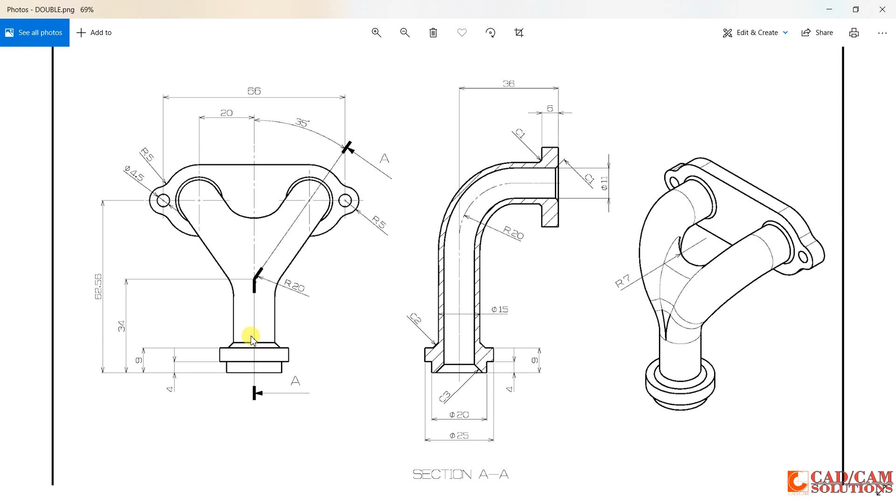Chamfer 1 and chamfer 2, both 1 millimeter chamfer. I will start from front and side views, from both, for creating a combined curve. So let's start with NX. First I will select this sketcher and click over front plane, meaning YZ plane, and click OK.

First I will draw this curve which will start from the origin and attain a certain angle. Now dimension it using rapid dimension. This length is 34, change it to 34, and again this, and the angle.

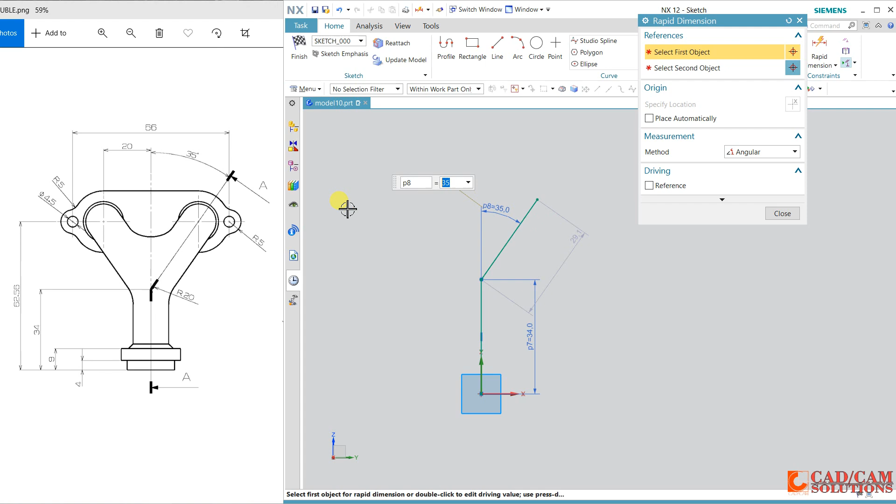So first I will define this angle as 35, enter, and height is 62.56. Change it to this, from this point to this point, and this is the length, 62.56. Now my sketch is fully defined, and here is a radius.

Select this fillet, and radius is between these two points. Finish it.

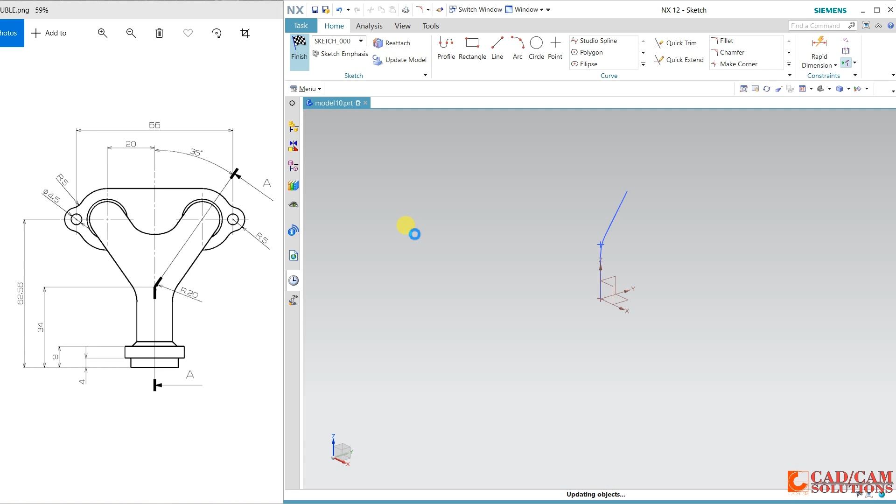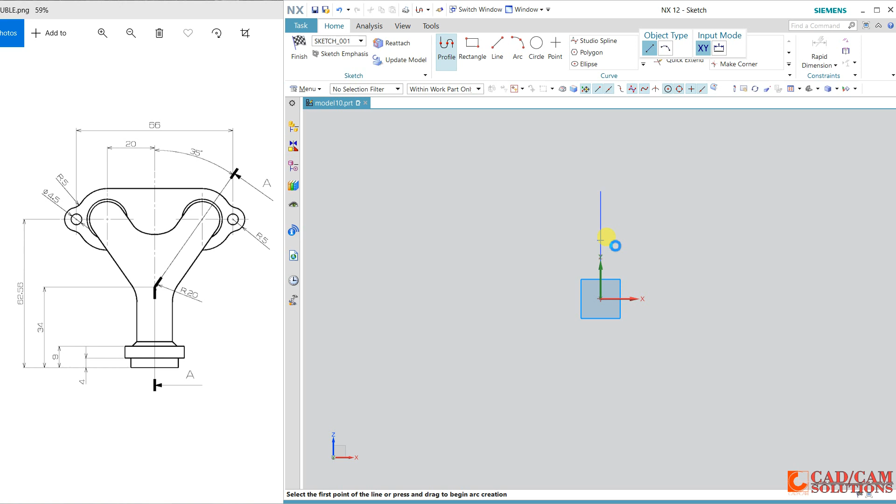Now select another plane which is our perpendicular plane, meaning this one. So for sketch, select this plane and orient the view so that it will come in front of us.

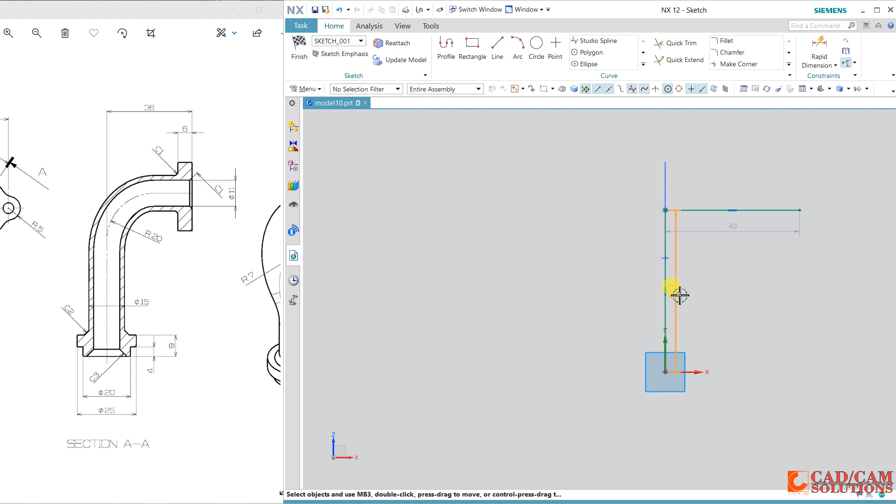Now second curve is this. I start from origin. Now dimension it: this length is 62.56, this is 36,

and one fillet is there which is of 20 radius. The sketch is properly defined, fully constrained.

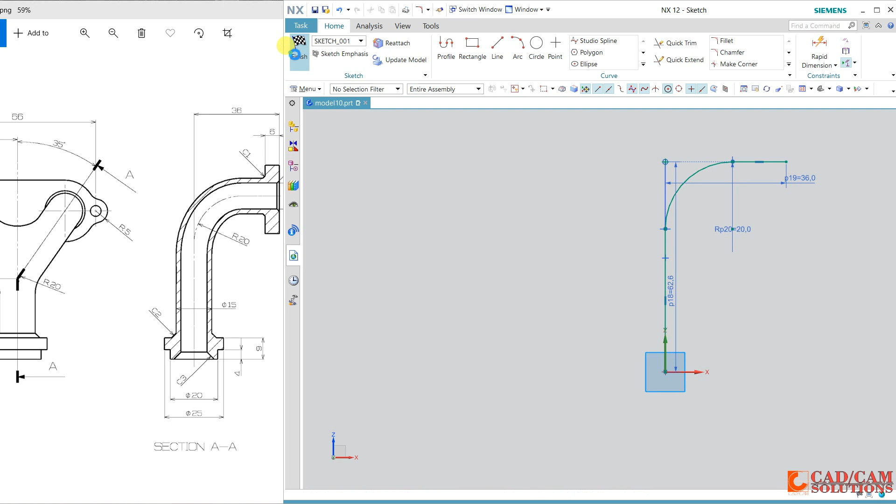Now we have two curves. Now I will generate a combined curve. You have to go to Insert, and here in Derived Curve we have one option: Combined Projection. This will create a combined projection of two sketches. My first sketch is this, and second is this. Now preview and click OK.

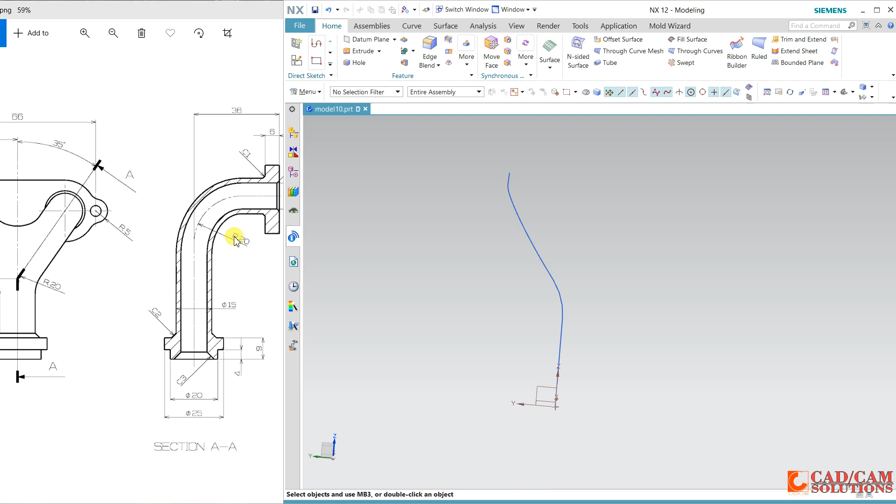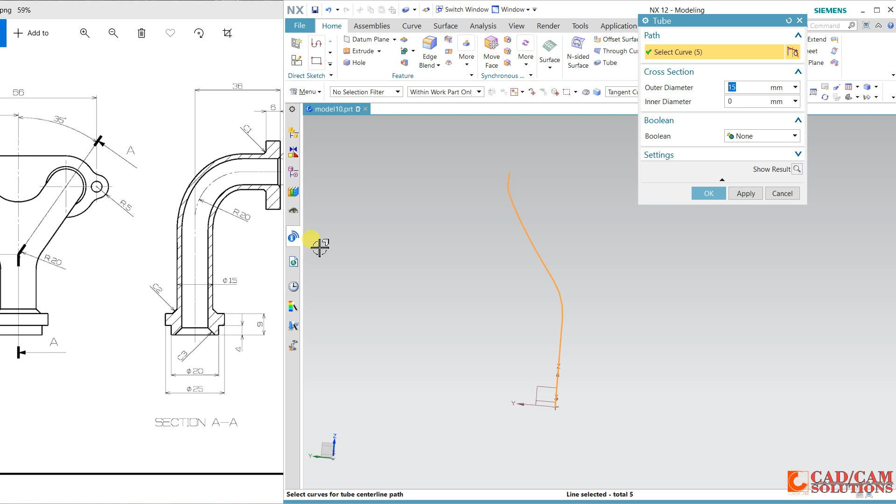Now I will take this tube. You will get this tube under the Sweep command. Here we have Tube, select this curve, and the outer diameter is 15. So select 15 and OK.

Now mirror it. So in more we have the mirror feature. Select and mirror about this point. Now I want to join these two objects.

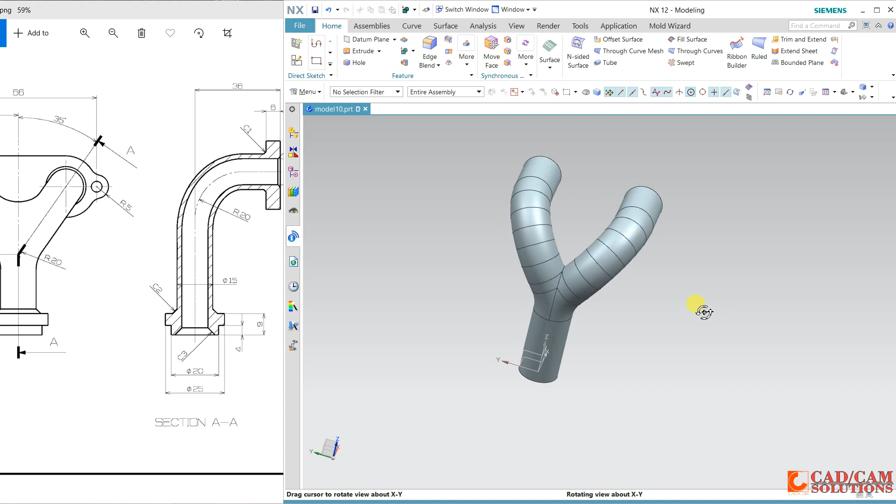Okay, and here we have one fillet of 7 radius. So select edge fillet and click over the intersection edge, radius is 7. So my sketch is ready.

But this is hollow. So again I will select this tube, and before selecting the tube we need this combined curve, which is here. So select tube, and this time the diameter is 11, the internal diameter.

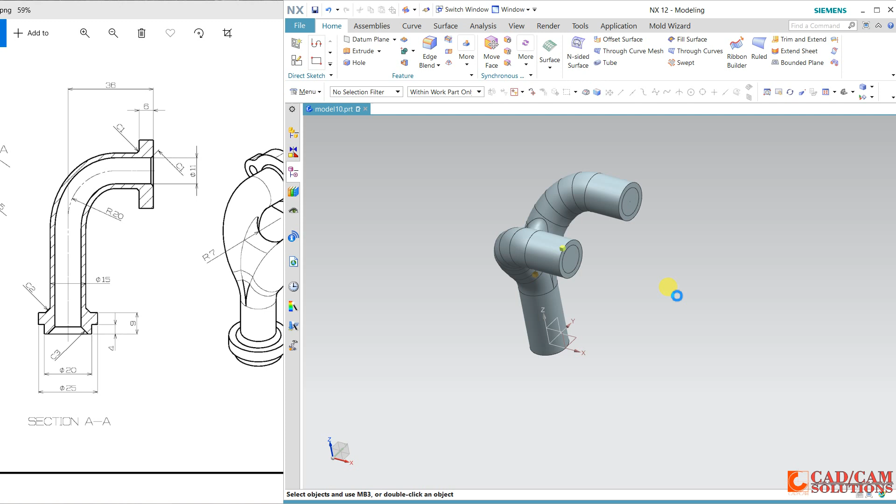Preview, apply, and mirror it with the mirror feature. Select this, and mirror plane is this, click OK. Now I will subtract these two pipes so that this combine will cut.

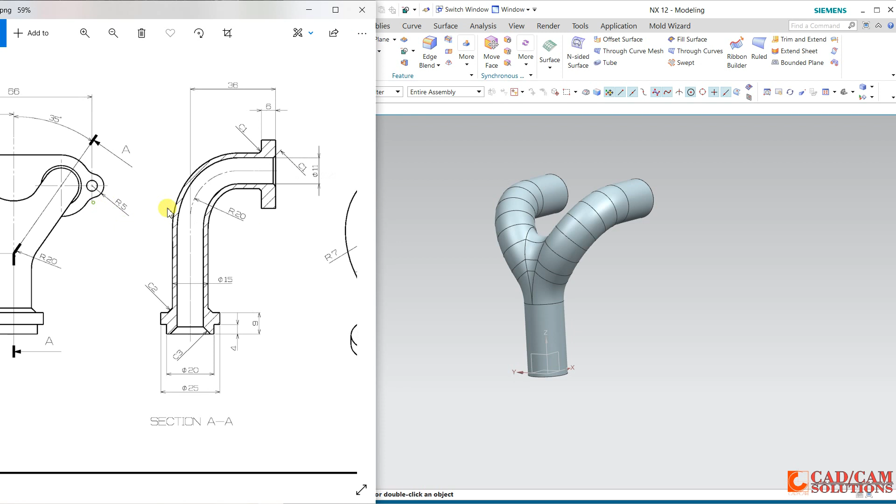So this is my main body. Now I will create this portion. Go to sketch, select this face, and orient the view, click OK.

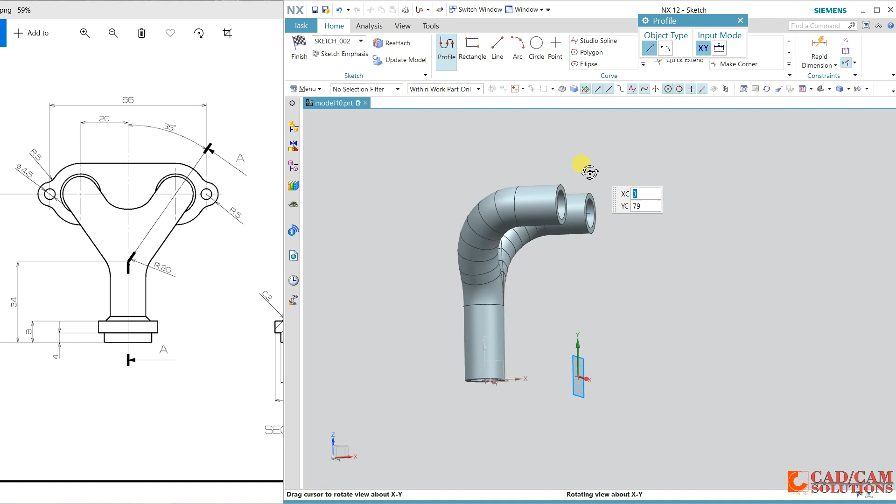Use this project curve, and one more circle is there. I will start from this and make equal radius.

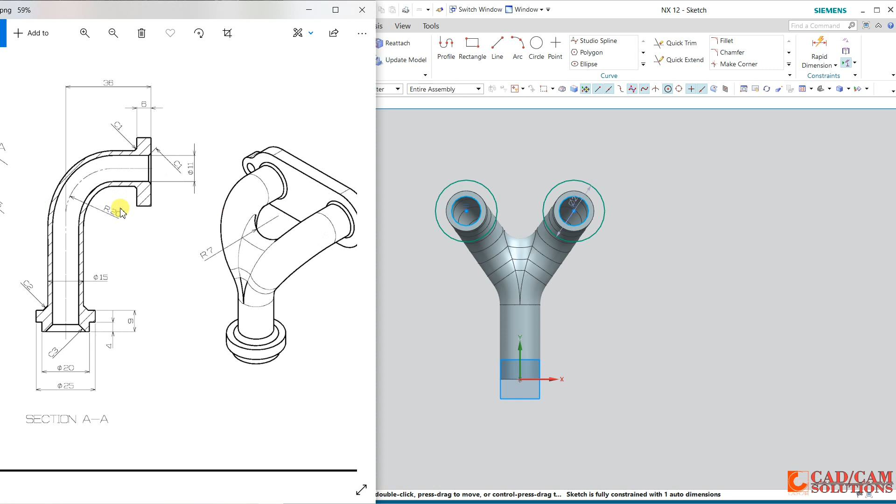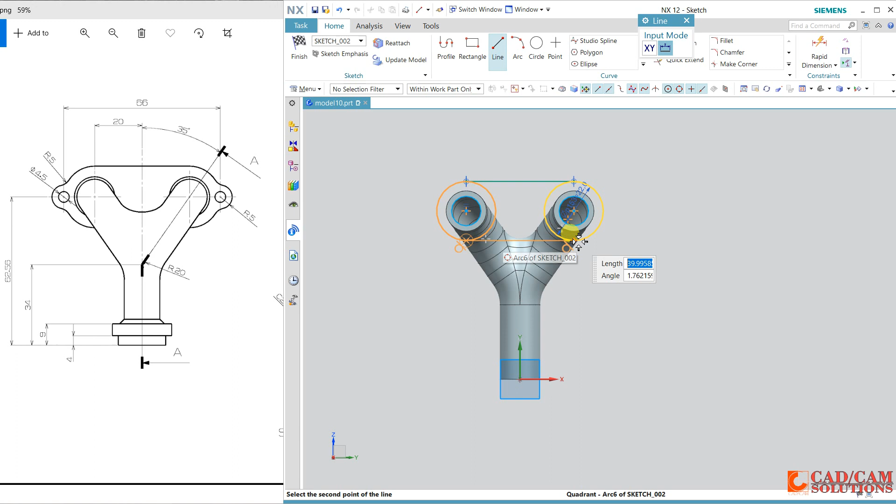This outer diameter is not given, so I will assume this diameter as 22. Now draw a line, one more line. Now trim this inner portion.

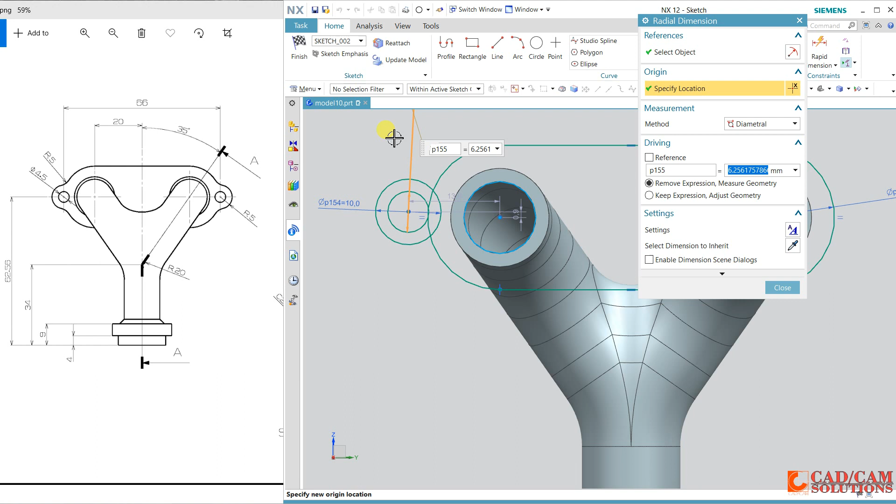And here we have some two circles, so draw two more circles. Now dimension it: this outer is 5 radius and 10 diameter. Change it to 10, and this smaller one is 4.5 diameter, and distance is 56 from the middle point.

So click from this, gap is 33, and center and this other center both will horizontally align. Use fillet radius of 5, draw, just undo it.

Here we have this option untrim. So select this and this. Okay, now I will use this trim.

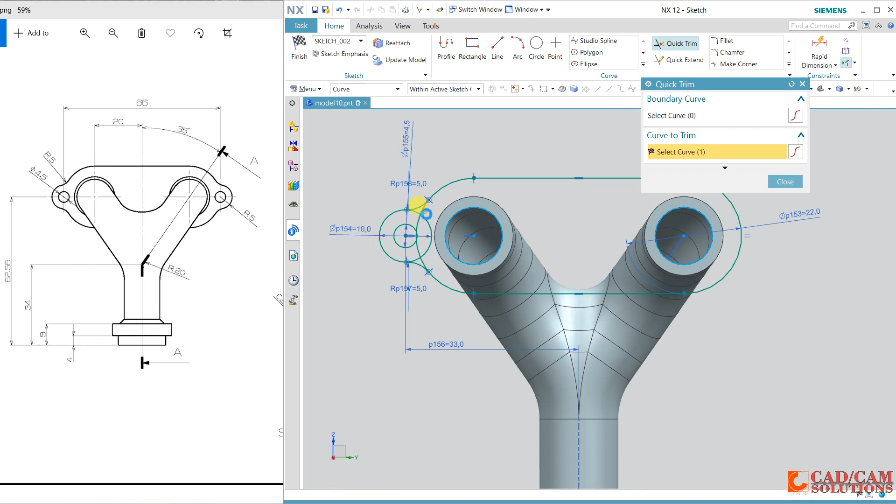Now covered properly. Now I will mirror this. Select mirror and curves. Center line is this one, click OK. Include this. Now use trim for this extra portion.

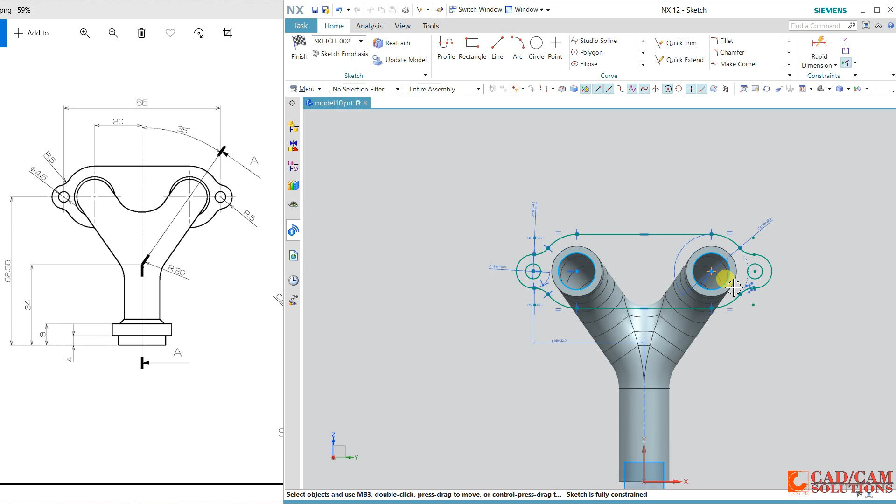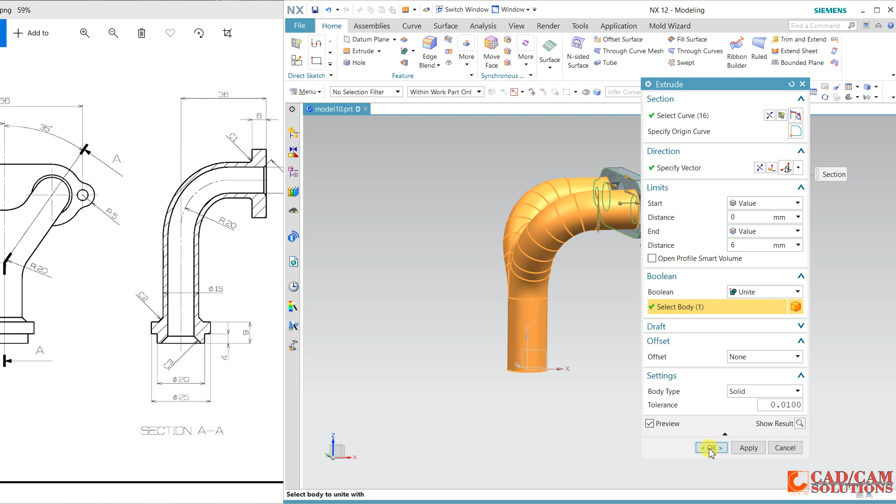Finish this sketch and extrude this 6 mm. So extrude, use infer curve, 6 is the height, and it must be united with the previous body, click OK, and see. If you want to hide this, select and hide.

And chamfer, we have some chamfer. This chamfer is 1, same, apply. Here also we have a chamfer of 1.

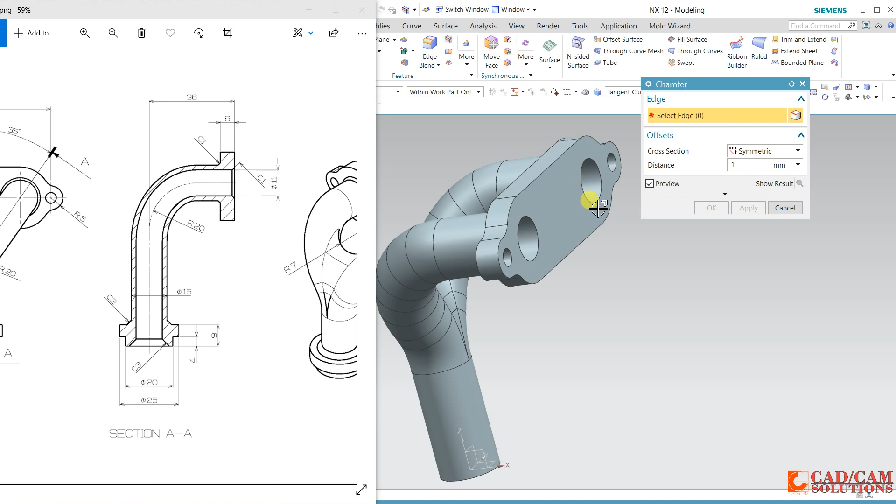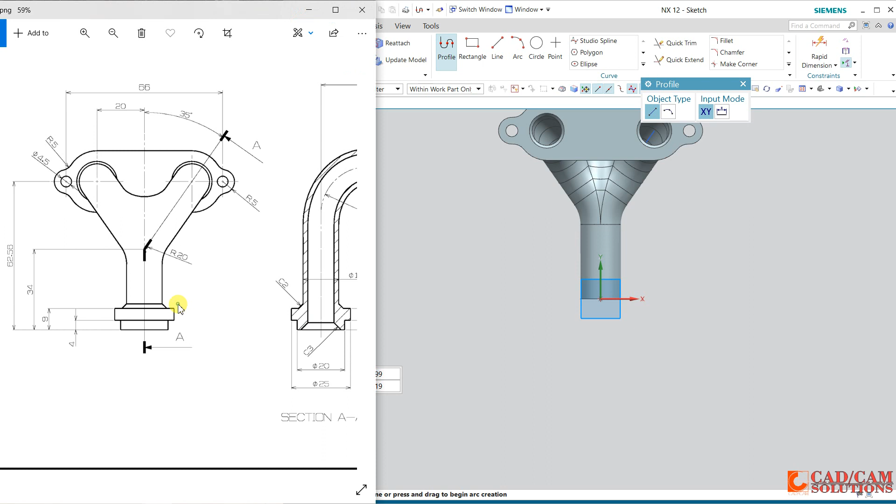Now we have some more geometry here. So select this front plane and see, draw a rectangle.

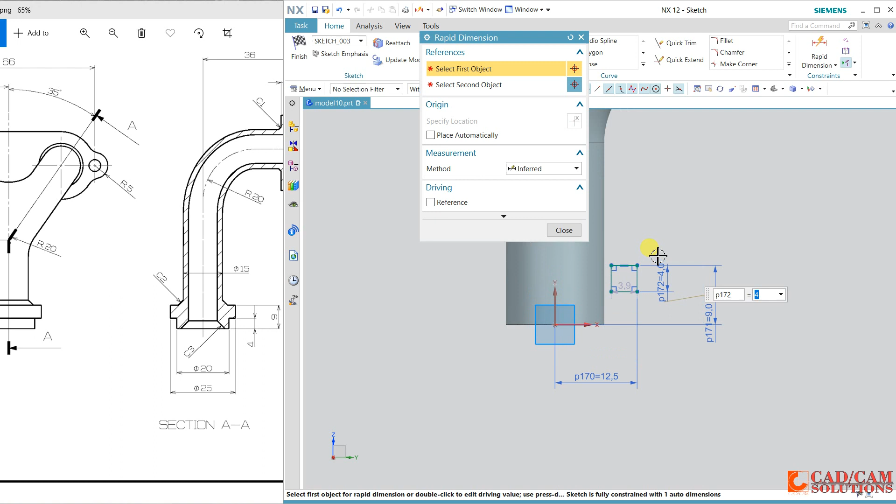Now dimension it. Half of 25 is 12.5, and 9, and 4, this lower one, just drag it or dimension it.

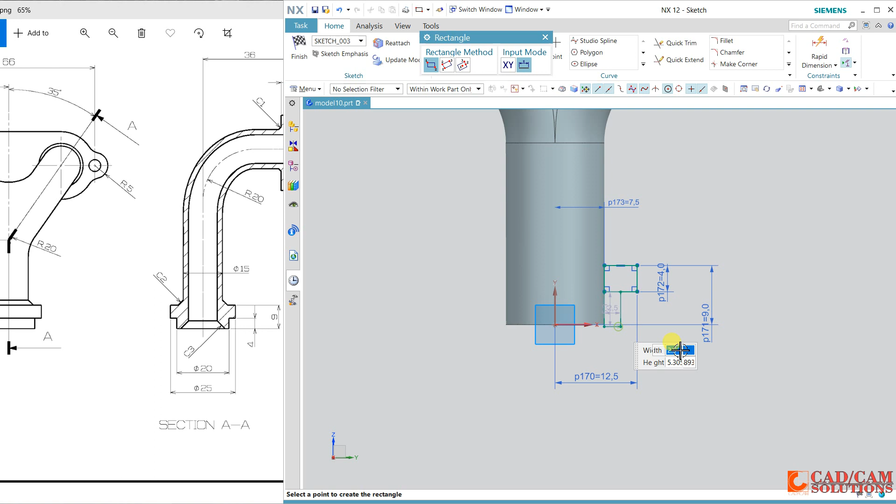And this dimension is, see, this 15, 7.5, so that it will touch it properly. And one more rectangle is there, make them horizontally align, and 20 is the outer diameter, so this value will be 10.

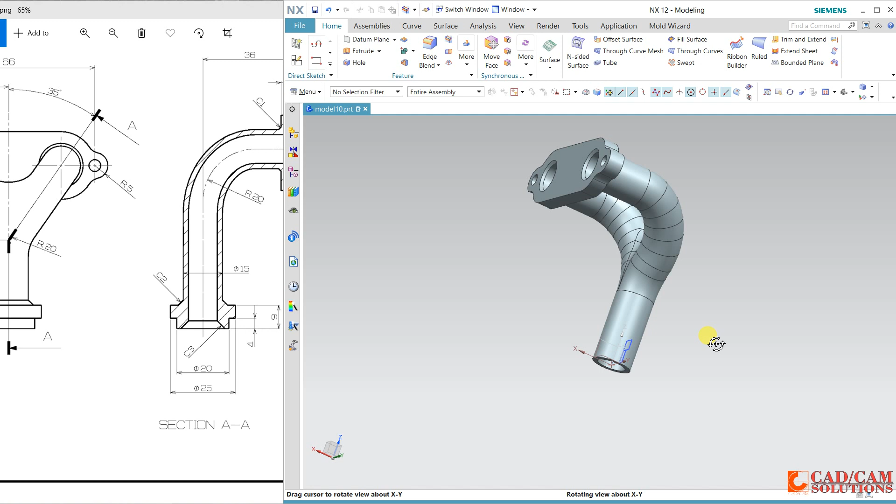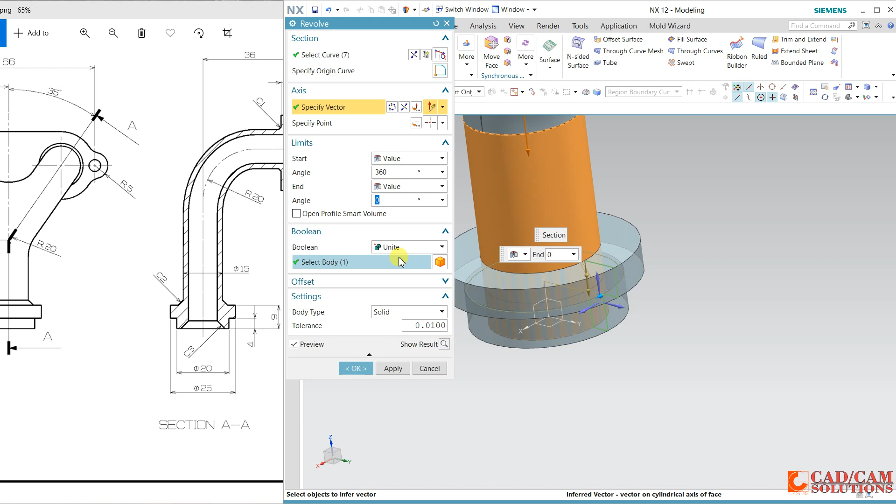Close. Now we will revolve this geometry using region boundary. So select revolve and click here, region boundary curve or region boundary curves 1 and 2, and vector and axis is this, unite, click OK.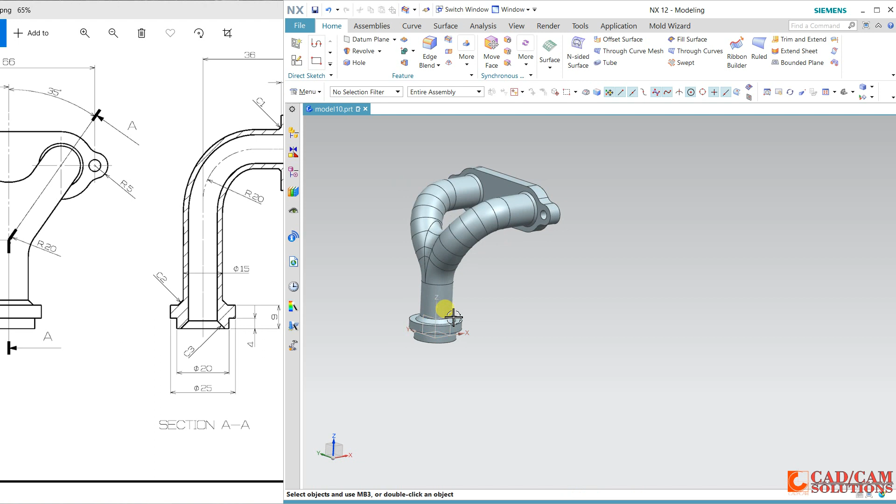See, geometry is created properly. Now use this chamfer: one chamfer is there which is 2 mm, and another chamfer inside which is 3. So the model is ready.

If you want to check, you have to section it. Just select this body and assign some color.